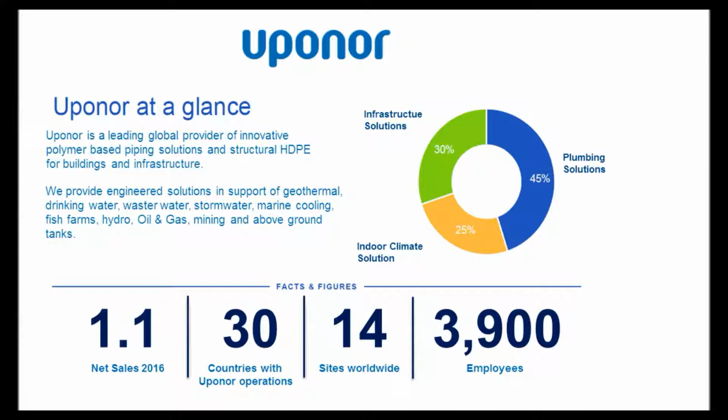Uponor globally also helps to support our local engineering groups in areas of R&D, FEA analysis, and project review and design. On more of a local level for North America, Uponor operates several offices located throughout the U.S. and Canada. Formerly, much of our business in North America was conducted under the name of KWH, which you may know us by, but in 2013, the name was changed to Uponor Infra, and that's how we're now recognized in North America.

We've been manufacturing HDPE since 1967, so actually this year we'll be celebrating our 50th anniversary of HDPE manufacturing. Some of you may be familiar with some of our trade name products such as Sclairpipe, Wehogas, Weholite, and Wehopanel. Those are our main trades.

All of our manufacturing facilities are ISO 9001-2008 certified. Our products and systems we have certified to many standards such as NSF, CSA, FM, BNQ, ASTM, and others. Since we manufacture and support systems right across North America, it's important to have those certifications.

Our head office is in Mississauga in Ontario. It is responsible for day-to-day project design, modeling, FEA analysis, 2D design, as well as support to our custom fabrication. As well, in addition, Brian heads up a lot of our FEA analysis and design as well.

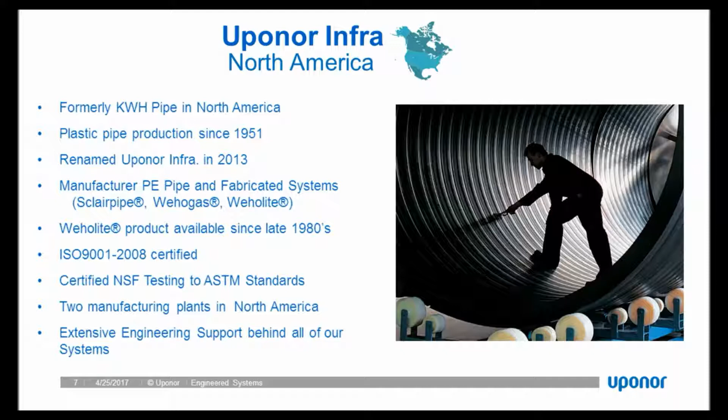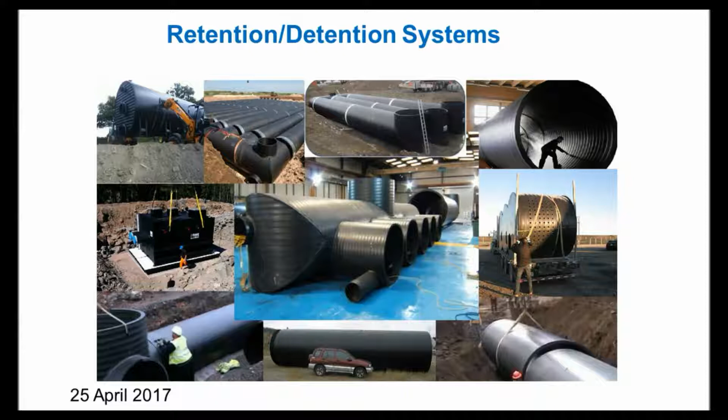Some of our retention-detention systems, just a quick collage of some of the systems we see. I won't go into it, but you can say we have barrel system designs, and what we'll be talking today is the modular design.

So quickly, since a lot of you probably already know what HDPE is, but just to touch on why HDPE is part of the resin properties. The resin used to make Weholite pipe and Wehopanel have long-term properties. The 2 main properties critical in establishing the long-term life expectancy of a 100-year design for it is stress rating, the maximum stress levels that can be sustained for a period of 50 years, and also slow crack growth resistance.

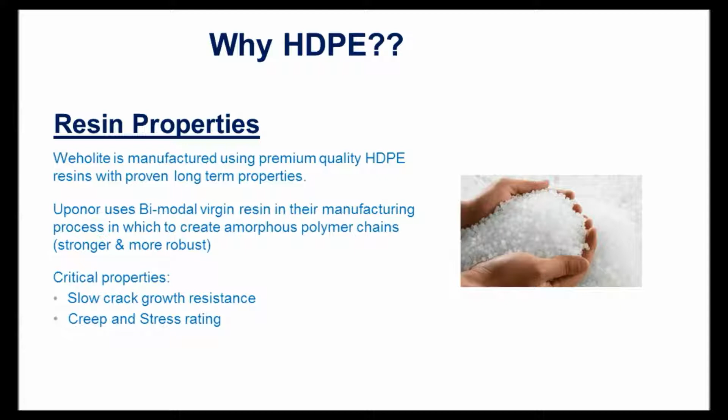The other aspect for HDPE, if you ever have a chance to see it on site, it's very smooth internally and externally. And the mannings, which we term as the manning number, this is the friction between a pipe surface and the water flowing next to it. The different piping materials have different friction factors in the mannings number. Concrete's initial value is 0.013, whereas HDPE has a significantly lower number.

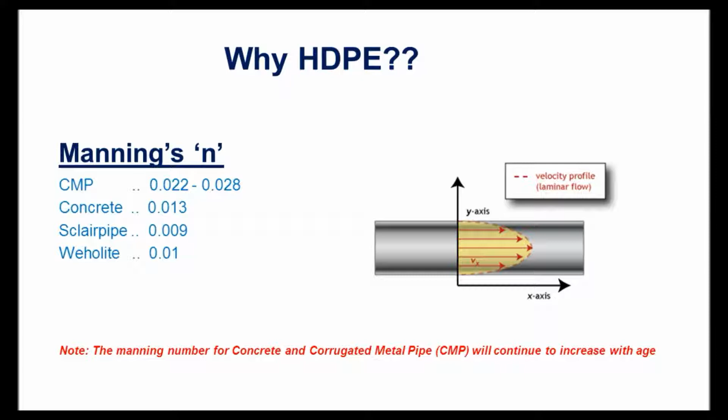What this means is that I can have a smaller diameter pipe for the same flow as something as a concrete pipe. So by using a smaller pipe, I can actually reduce my costs but maintain my same flows.

Concrete versus flexible pipe, and I bring up concrete because that's probably much one of the main things we see in the industry, which is slowly changing to more polymer solutions.

You can kind of see this is kind of a standard photo on the left. You can see it's a photo taken from the American Concrete Pipe Association, basically promoting the virtues of rigid concrete pipe. You can see a bunch of people and sacks weighted on top of this pipe.

It points out that the primary feature of the concrete pipe, and that's really it supports a lot of weight. The rigid pipe design approach is well accepted design method.

But today's pipes are designed using flexible pipe approach, uses the surrounding soil of buried pipe to provide some structural support to the pipe, whereas concrete provides all of the structural support and can be buried very close to the surface. What flexible pipe does, it

uses the interactions with the soil to provide additional support. And by using the flexible pipe to interact with surrounding soils, we benefit by having a pipe capable of addressing developed stresses resulting from misinstallation, which is a big one, rather than developing pinpoint stresses or developing stress fractures or shear cracks in pipe, which are sitting on top of rocks.

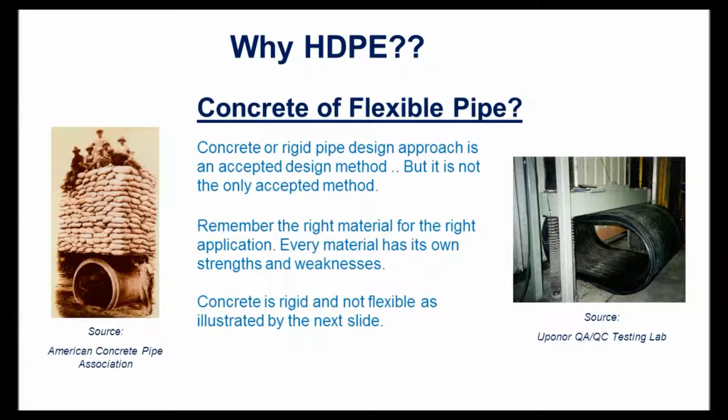To further, just to touch on that a little bit more, both rigid and flexible pipe design methods work. Like anything, is that there is no panacea or one solution fits all. But in cases where you're burying pipe, HDPE is a very good option.

The rigid pipe, with help of surrounding soil, has sufficient strength to carry imposed loads. Flexible pipe is deflected and mobilize sufficient soil support to carry imposed loads. Deflection of pipe is typically equalized.

You can see in this picture the radial pressures acting inwards, loaded like a compression ring. This illustrates failed conditions on a concrete pipe, because it can't flex and use the surrounding soil, it has to take the entire load. This occurs when the imposed live load or dead loading conditions are exceeded.

So just a quick overview of the difference between flexible and rigid pipe.

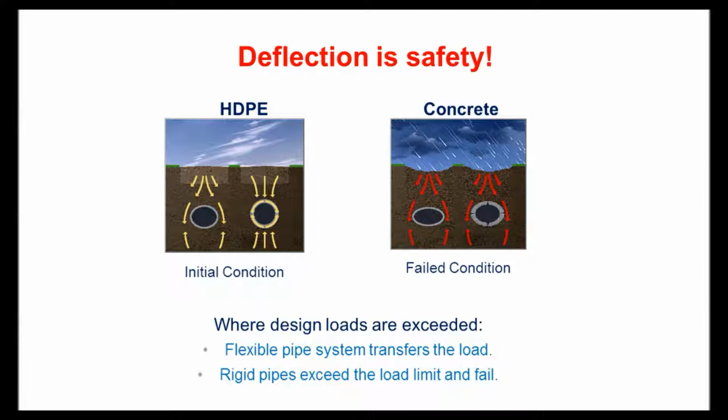The other important characteristic of HDPE is the inertness of the material, which allows us to design to a 100-year design life. Acid and bases commonly cause premature deterioration in stormwater systems, especially concrete, as it dissolves the concrete. Acid and bases can enter a stormwater system through the introduction of fertilizers, industrial soaps, or any other contaminant that can be flushed down a sewer.

Hydrogen sulfide is also a concern. It can cause deterioration of the concrete pipe, particularly at the crown, where it's typically present when organics are in the water, whereas HDPE is unaffected by H2S or hydrogen sulfide.

Lastly, HDPE is a non-metal, so it doesn't suffer from corrosion mechanisms such as oxidation reactions. Many concrete pipes, such as pre-stressed concrete cylinder pipe or PCCP, have metal wires wrapped around the inside of the pipe to help strengthen it. The problem occurs over time when these metals corrode and snap, the wires lose their integrity, and in turn the entire pipe loses its structural integrity.

Another benefit to HDPE is its abrasion resistance. When impacted, it's able to absorb the energy from particles. So any application where you see particulate or sand, this is the material to use because it reduces abrasion, and it's very common to have sand or particulate in a stormwater sewer system.

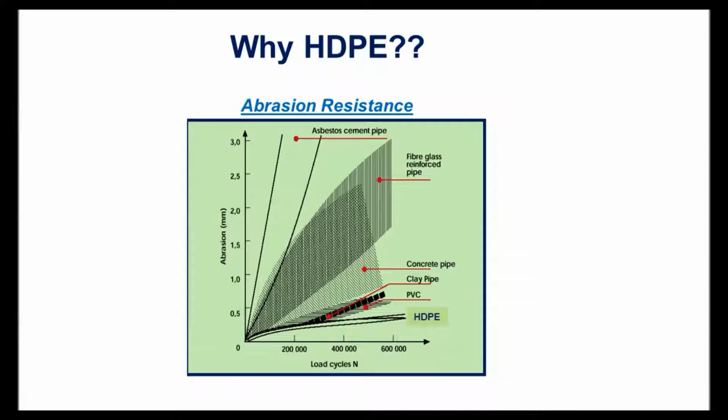I'll just leave one other slide before Brian takes over. I was at a conference a year ago, and one of the presenters brought up that we're seeing a movement in North America away from conventional materials, toward HDPE, or polymer generally since PVC is there as well. Polymer pipes and materials are moving up and becoming more recognized within municipalities, due to more applications being successfully installed and people realizing that overall operating costs and life cycle costs have dropped significantly.

So that being said, I'll hand the presentation now over to Brian.

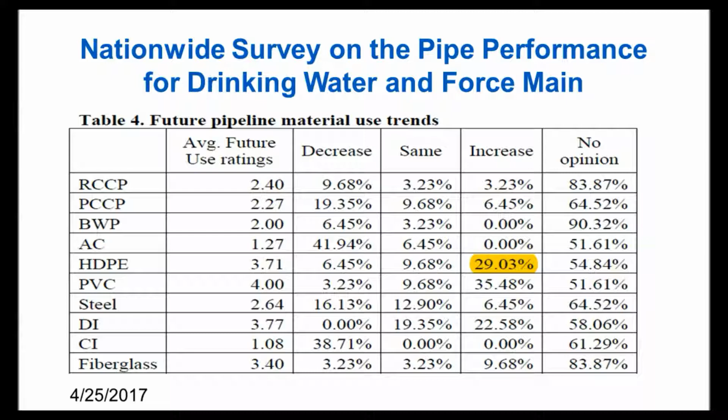What I'd like to do now is briefly discuss Weholite and Weholite modular materials, how they're fabricated, and how they can be utilized for a number of different applications. Then we'll speak to stormwater water quality and quantity management and how Weholite modular can be utilized for those applications. We'll briefly cover thermoplastic welding, structural design, and then cap it off with a review of our recent in-field live full-scale load test that we conducted to validate our structural design methodologies.

As Grant mentioned, Weholite has been manufactured in North America since 1981. We have been producing ASTM F894 structural profile wall pipe up to 132 inches in diameter in 2 facilities in North America. In 2013, we took that rectangular panel cross-section and utilized it to develop a material we refer to as Wehopanel, or also Weholite modular, our rectangular configuration for structural profile wall systems.

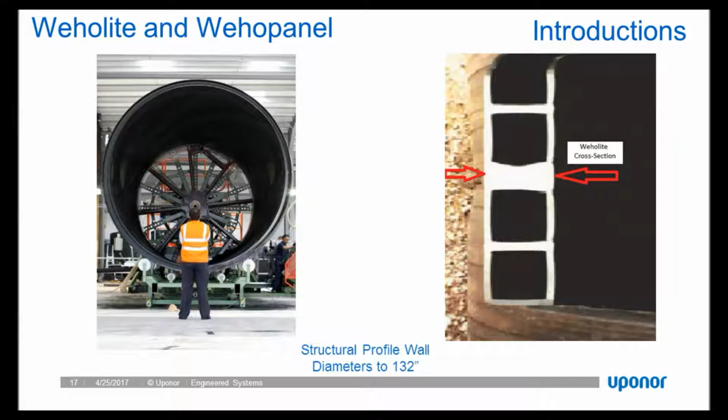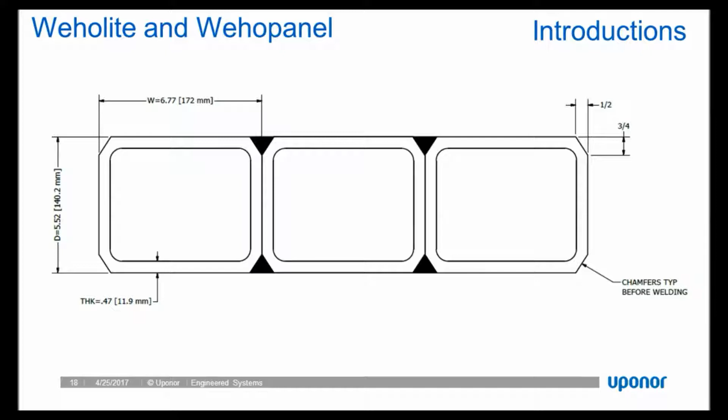Both Weholite and Weholite modular rely on a robust rectangular cross-section, which you can see there. This gives us a double wall profile and allows us to provide both inside and outside extrusion welds to provide an extremely durable system that's ideal for applications where a leak-free system is required, specifically stormwater, wastewater, and potable water applications where zero leakage is acceptable. Weholite and Weholite modular are ideal solutions for those applications.

Here you can see a snapshot of a 132-inch diameter Weholite vessel being extruded in a spiral wound configuration in our Huntsville manufacturing facility with our quality control inspectors. You can see in that photo the individual stripes represent the individual rectangular profiles and the extrusion weld between them.

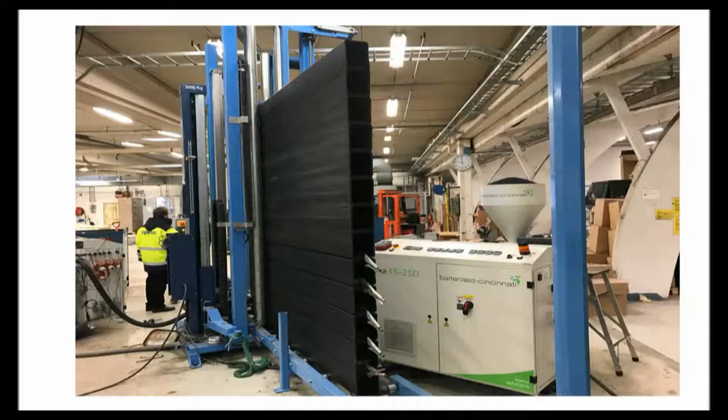Similarly, we can extrude panels of material in our Wehopanel and then use those flat sheets to create rectangular structures, bulkheads, baffle walls, anything you can imagine. What Uponor endeavors to do is take our Weholite and Wehopanel materials and combine those with thermoplastic fabrication and fusion welding to create a host of applications for the water, wastewater, and stormwater space—essentially anything you can think of where the pumping, treatment, or storage of water is required.

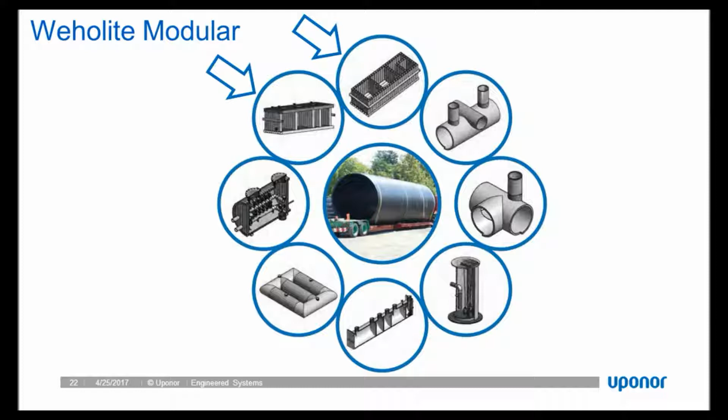We can manufacture a custom-engineered solution that not only provides a leak-free solution, but also provides a system that has a 100-year design life and enhanced durability.

There are some distinct advantages to Weholite modular, rectangular configuration, 100% polyethylene systems. What most folks would come to conclude is that durability and sustainability are the primary advantages. We're immune to pH, hydrogen sulfide, and corrosion, and can provide a 100-year design life.

What most folks also don't know is that polyethylene welds much like steel, and that allows us to design and fabricate almost any configuration necessary to support a project, whether it's internal baffle walls, pumps, controls, instrumentation, suspended solid hopper bottoms. We can come up with a design to meet the project needs by custom fabricating all the internal controls and components.

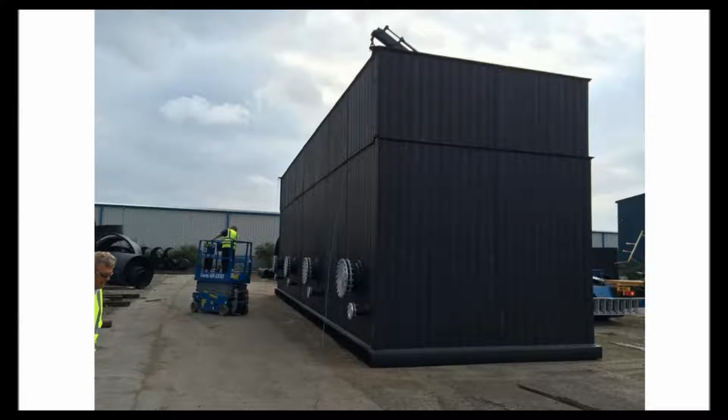Some examples of the versatility of the material that are a little bit outside the stormwater quality, quantity, and other boxes that folks might think of. We'll show you some projects here.

This is an extremely large, 14-foot high, 50-foot long, total suspended solids baffle wall separation system. This project, in addition to demonstrating the versatility of the material, also shows you that we can produce much, much larger structures than could normally be accommodated with concrete.

Had we built this structure in particular with concrete, it would have required multiple loads. If it were precast, if it were cast in place, it would have been an extensive forming and pouring time in the field to create a structure of this magnitude.

Alternatively, we can create this structure as one unit with all internal components prefabricated in it, and also quality control tested and leak inspection tested in the factory and in the field to ensure a high-quality leak-free system is achieved.

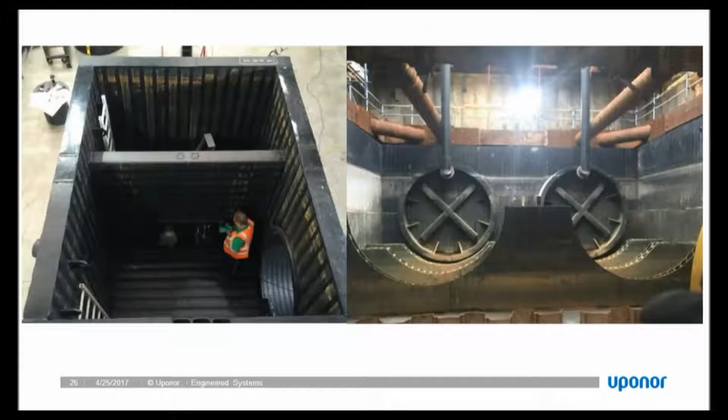These two photos just demonstrate some more details and applications we can use Weholite Modular for. Here on the left-hand side, you see a stormwater outlet control structure that has a polyethylene baffle wall with low-flow controls, access ladder, and inlet port.

That particular baffle wall would have to be reinforced to accommodate full hydrostatic pressure differential, or ponded depth on one side and zero ponding on the other. And that's something that the Weholite structural profile allows us to reinforce the annular space to accommodate any loadings we encounter in the field or in design.

On the right-hand side, you see a large-scale hydroelectric power plant intake facility that was actually welded in the field to support the magnitude of that project, just demonstrating the versatility of the material.

Another project which also demonstrates the versatility of Weholite is what we refer to sometimes as engineered art. This is an above-ground ultraviolet treatment facility for a potable water plant.

This particular project required haunch support, as some might conclude. Horizontal pipes full of water require support of the haunches to prevent the pipe from squatting under the weight of water. So we're able to actually use Weholite panel to create that haunch support and a base for the system.

And develop a completely leak-free polyethylene UV treatment system and deliver it to the project ready to be plumbed and brought online. Just another example of the versatility of the material and our ability to support engineers with developing new solutions to old challenges.

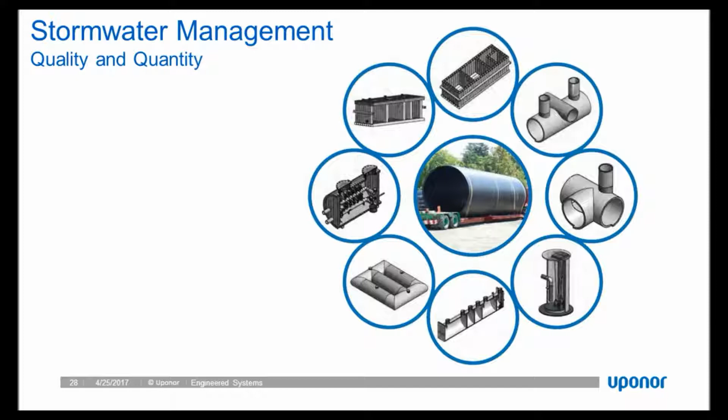So what I'd like to do now is branch into some specifics regarding stormwater management, specifically quality management and quantity management, and how we use Weholite Modular to meet those challenges. To discuss quality management, we need to break out hydrodynamic separation and media filtration as two distinct approaches to providing particulate removal, TSS (total suspended solids) removal, and total phosphorus, which is usually the nutrient tracked in most jurisdictions for nutrient removal.

When we speak to hydrodynamic separation, the industry and jurisdictional authorities have evolved to prefer it be utilized for pre-treatment only. It can be used in some jurisdictions as standalone treatment. However, it does not achieve the removal rates that media filtration does, so most jurisdictional authorities have relegated hydrodynamic separation for use as pre-treatment, as part of a treatment train to provide trash, debris, and large particulate removal. HDS systems typically remove particles in the range of 125 microns and up.

They're typically awarded a 50 to 60% total suspended solids removal rating and a pretty low 20 to 25% nutrient, or total phosphorus, removal rating. So when we look at HDS, we should be aware that HDS systems are typically vessel systems, round, cylindrical, vertical vessels, or horizontal systems with baffle walls. So Weholite modular, large-scale rectangular structures are not often going to be cost-effective approaches for the smaller-scale HDS pretreatment units.

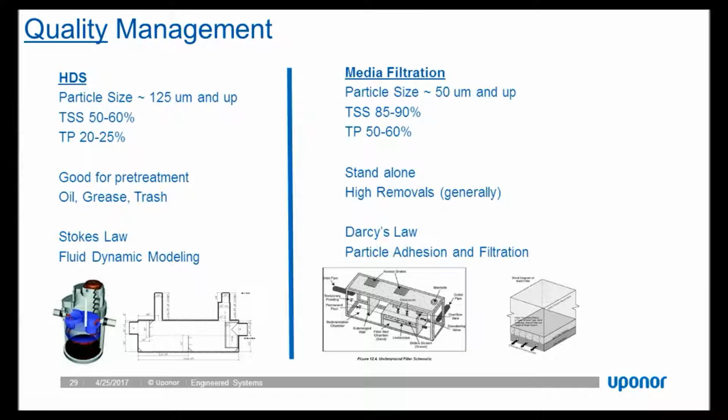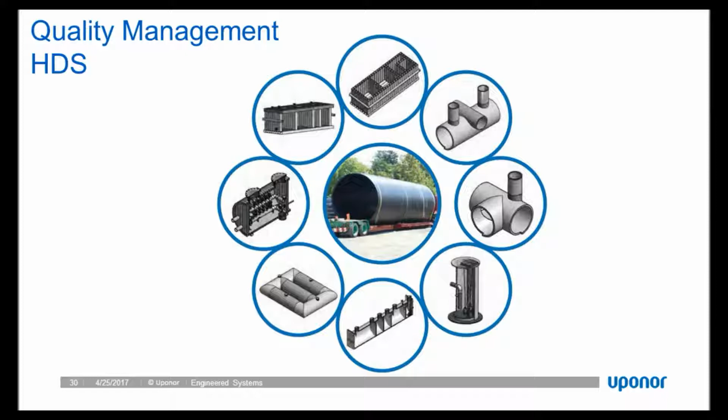So to speak again to hydrodynamic separation using Weholite modular, we're not looking at smaller scale, round, vertical or horizontal vessels. We're looking at larger scale systems with high debris loads and high flow rates, where we want to remove large amounts of sediment and/or handle high flow rates. Uponor can work directly with the engineer to develop a custom system that uses hopper bottoms, internal baffle walls, and flow controls to remove 50 to 60% total suspended solids, trash, and oil. And you're also going to get that 20 to 25% total phosphorus removal rating.

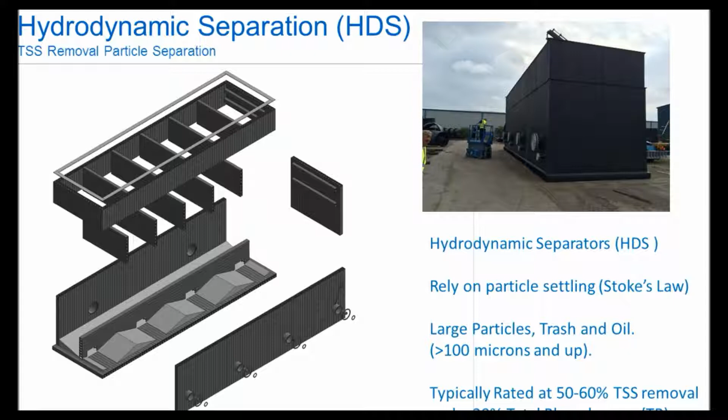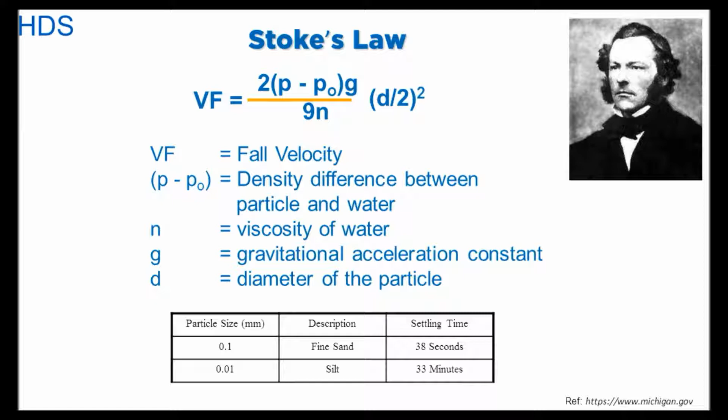The basics of hydrodynamic separation design go back to Stokes' law. In the interest of time, I'm not going to go through Stokes' law, but basically what we would do is work with the engineer of record and develop a TSS removal calculation that supports their project based on the most critical design parameter, which would be particle size, and then also flow rate. Then, based on our knowledge of the project site, we determine the debris loading for that particular project. Uponor can support any project where the engineer wants to develop a custom large-scale Weholite modular hydrodynamic separation system in accordance with jurisdictional regulation.

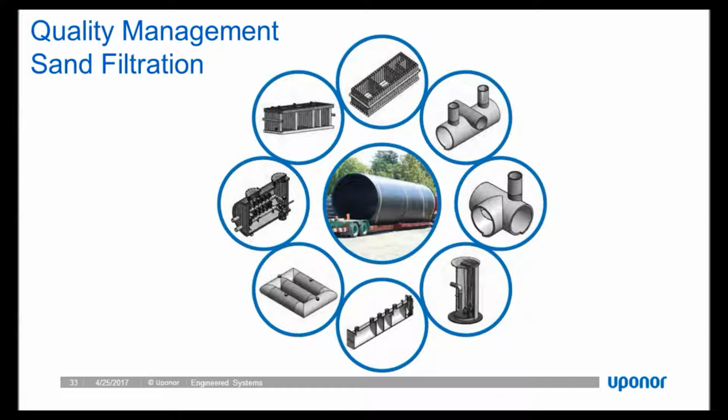Moving along to quality management using media filtration, as we said earlier, sand filtration has been around for a long time, highly tested, validated, and approvable by most jurisdictions. Uponor has taken the approach to adopt local sand filter regulations and design methodology and incorporate those into our Weholite modular system. Historically, structural sand filters had fallen by the wayside because their size and scale in precast form made them less cost effective. But because we can now build a rectangular vault much larger and more cost effectively using Weholite modular, we're able to build larger sand filters more cost effectively and make them a more viable option for projects.

For those not familiar with structural sand filters, it's a fairly simple concept and very easy to maintain. It has an inlet pipe with an energy dissipator and a sedimentation bay that allows sedimentation, trash, and debris to be isolated to the front of the system. It's typically sized to 25% of the water quality volume in that first chamber there on the left.

We'll have a baffle wall followed by a level spreader to distribute flow across the media bed. Then we'll have a sand filter bed that also has geotextile and gravel on top to prevent channelization, occlusion of the sand media, and erosion and scour.

That sand filter bed area is sized to provide water quality treatment for the flow rate on a given project, based on the impervious area and the water quality depth for that project. Finally, we have an outlet control wall and an outlet control bay that can have low flow discharge to regulate your low flows in accordance with your local regulation.

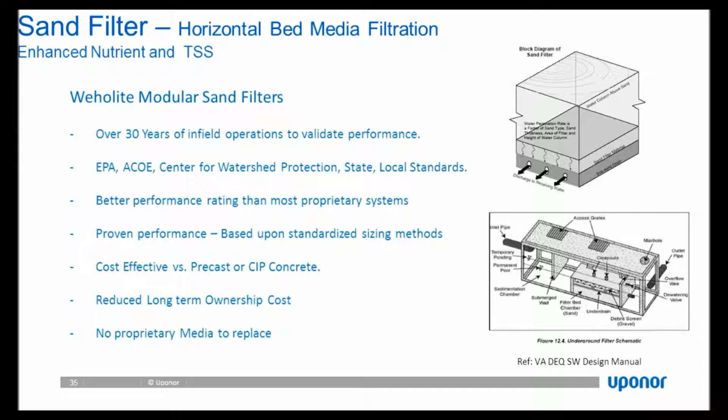So Uponor has taken this approach to provide media filtration in a non-proprietary way, to free owners of the burden of being locked into a long-term proprietary media replacement program.

This slide demonstrates the host of testing and design calculation standards out there in the industry. Any one of us can Google our jurisdictional authority and type 'sand filter' after it, and it's likely you'll find a standard in your area, but it'll all link back to Darcy's law.

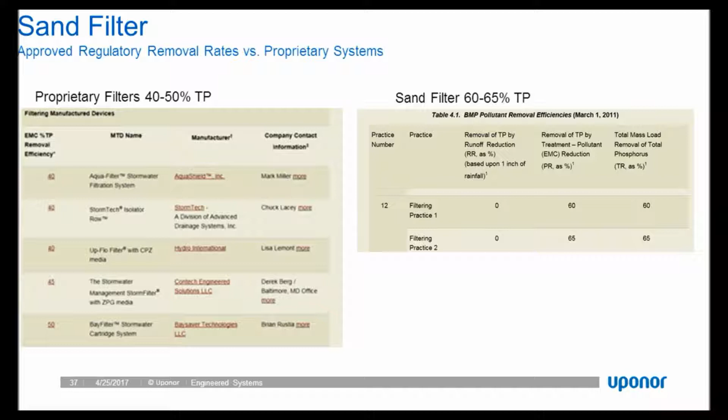This particular table demonstrates that the Virginia DEQ only awards a 40 to 50% total phosphorus removal rating to proprietary systems, whereas sand filters get a 60 to 65% total phosphorus removal rating with the Virginia DEQ, who is a recognized authority in the world of stormwater quality management.

There are 3 distinct standards you'll see in jurisdictional authority guidelines regarding sand filter technology: specifically the Washington, D.C. Underground Sand Filter, the Delaware Sand Filter, and the Austin Sand Filter. These technologies have been around for over 30 years. However, the D.C. Underground Sand Filter Vault is the structural BMP sand filter you'll see most used.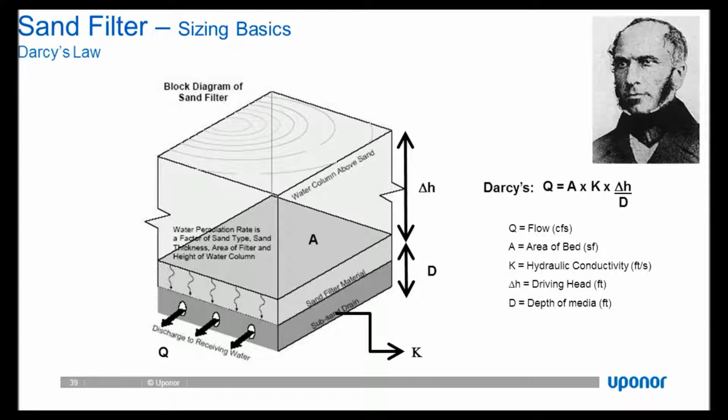Some might also change the volume required for the pretreatment bay, or the max depth of the media, or head over the system, but they all still rely upon the fundamentals of Darcy's law. If you understand Darcy's law and flow through the media, you'll be able to quickly decipher the jurisdictional authorities' guidelines for sand filter sizing, and it'll become a little clearer as you look at it.

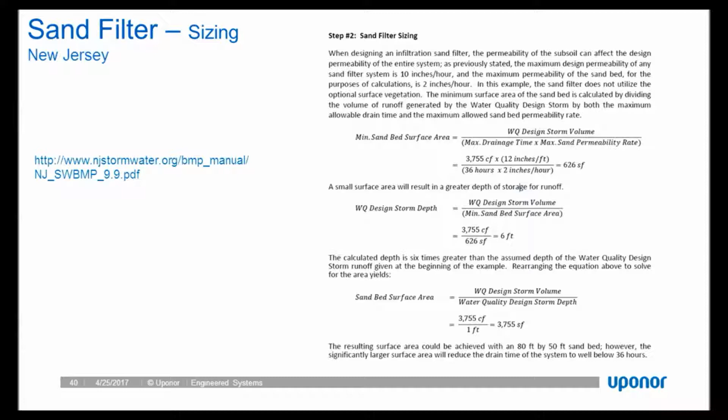To that effect, the New Jersey Stormwater BMP Design Manual has sand filter specifications and sizing regulations based on a water quality design storm, where they correlate the water quality flow rate volume to a filter bed area, and that's how that's calculated.

Conversely, we also have the Virginia DEQ, just as an example, where the area of the filter is based on a treatment volume—again, water quality volume. That's your volume of water that requires filtration.

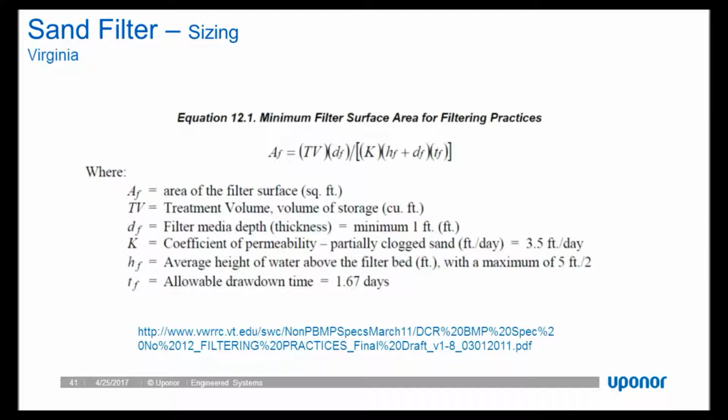Their surface area is based on that, but again, both of those methodologies link back to Darcy's law. Not to spend too much time on sand filter calculations, Uponor will work with the engineer of record, civil engineer, to develop sizing that works with that particular jurisdiction, whether Seattle, Ontario, Virginia, or Florida. We look at that jurisdictional authority's sizing methodology.

We have extensive sand filter sizing calculation tools. We rely on the civil engineer of record to do the hydrology, to calculate the water quality volume, their channel protection volume, and their low flow water quality flow rates and high flow rates.

We provide some form of splitting, either a low flow, high flow orifice or weir split prior to the structure. Then we take that information and design the sand filter based on the local jurisdictional authority requirements, sharing that with the engineer along with some structural details, specifications and standards for the sand filter so they can incorporate it into the plan.

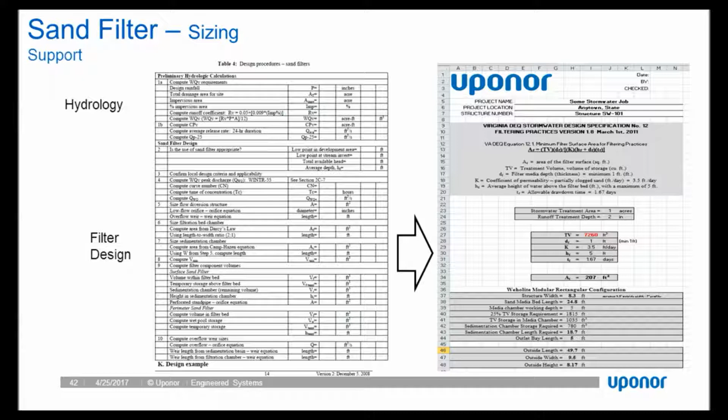That's the level of support we provide engineers, recognizing that many engineers do not have structural design capabilities or sand filter design capabilities. We're here to help them get through and give them the tools and resources they need so they can support their owners with a non-proprietary system.

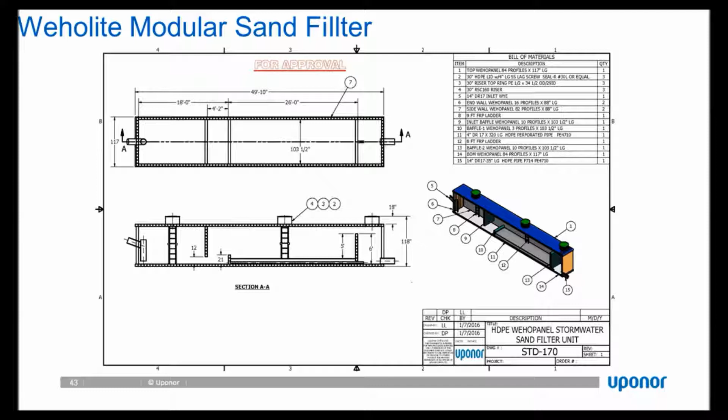Here you see a snapshot of a Weholite modular sand filter drawing. It's a very simple bill of materials, identifying all the components inside the system. Again, you saw this slide earlier where we talk about the fundamental components incorporated into any sand filter. This is a good basis of what most sand filters would look like.

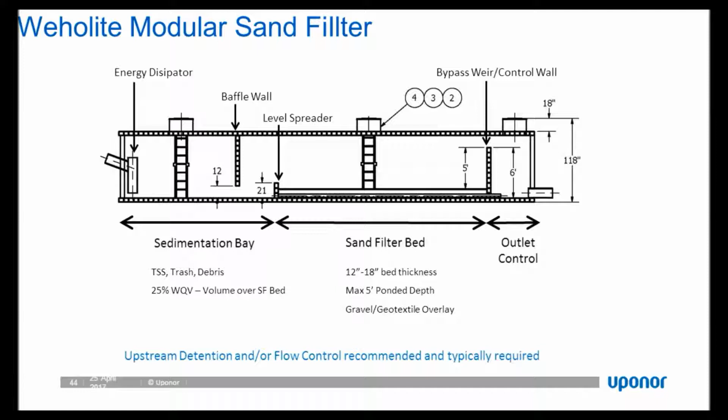If they needed to get larger, we could also link multiple units together to create much larger sand filters as required for a given project. So with that, I'm ready to transition into quantity management and storage.

Where quantity management is concerned, we don't discuss it here in depth since this is a Weholite modular rectangular discussion. However, Uponor does manufacture large manifold storage structures using large diameter pipe, up to 132 inches in round pipe, with prefabricated manifolds to connect them hydraulically. When storing large quantities of water below ground for peak flow attenuation, round pipe is almost always going to be the more cost-effective approach.

So when we're looking at a project and supporting an engineer, the first place we'll look is whether we can get a round configuration to fit within the available footprint, because that's going to be more cost-effective. However, if existing site conditions, building location, roads, existing or proposed utilities, or other project features significantly limit the footprint and make round infeasible, then we can look at doing a rectangular Weholite modular detention structure.

It will be slightly more costly than a round system. However, the benefits of reducing the footprint can also sometimes reduce the backfill, excavation cost, and disturbance on other parts of the site, which may make that additional cost worthwhile for the project. And we can look at both round and rectangular.

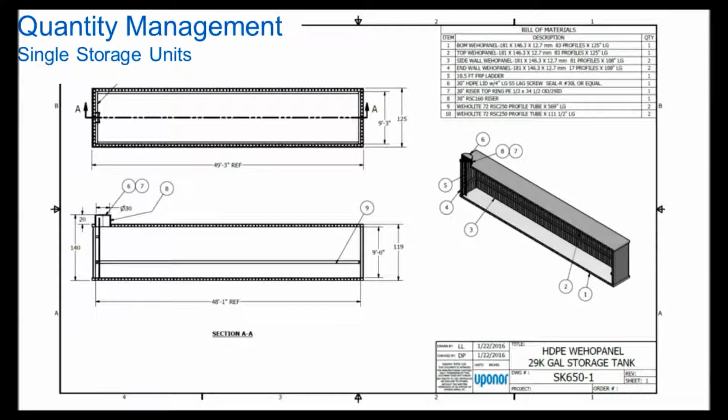This is a snapshot of a simple rectangular Weholite modular quantity management system. This one would just be a single structure. We can incorporate an outlet control baffle wall with low flow, mid flow, and high flow weirs, and any internal components necessary for the project into that quantity management system, including a confluence with an energy dissipator to bring multiple pipes into, say, a forebay inside the structure. We can do that as well with some internal baffle walls.

Similarly, we can link multiple Weholite modular structures together hydraulically in what we refer to as a Weholite modular array, where we take multiple structures based on the available hydraulic storage depth on a project, how much ponding we can get without impacting the upstream HGL. That dictates how much height we have in the system, and obviously our site footprint would dictate the horizontal configuration.

We can typically squeeze much more water into a tighter footprint using a rectangular Weholite modular array than we can with round. Additionally, we don't have the pipe-to-pipe backfill that we'd see in a manifold system, so the systems become significantly smaller, and typically a Weholite modular footprint would be about 50% of an equivalent round footprint. So again, round is going to be more cost-effective. However, if you do not have the available footprint, rectangular can often be used to solve those challenges.

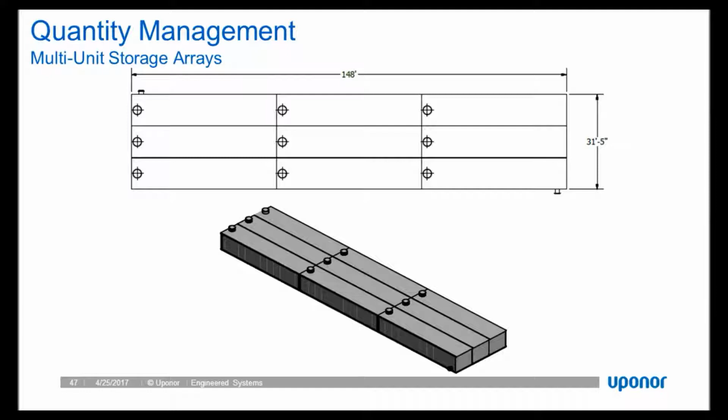Here we can see another snapshot of that array and some detailed plans, and how we handle the hydraulic connectivity between the two vessels in that slide there.

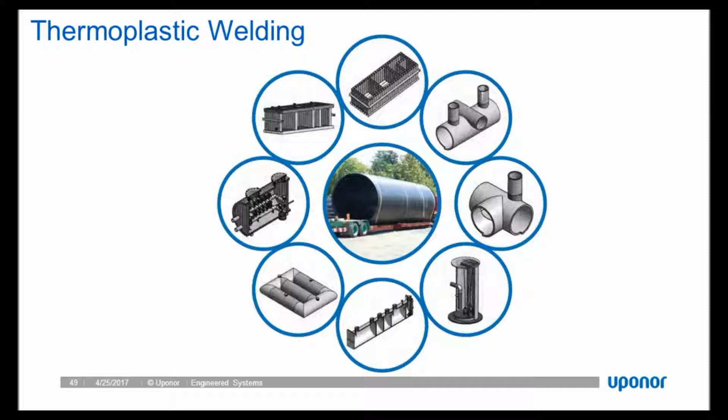So now I'll move on to thermoplastic fusion welding. This could be a very long discussion, but I decided to include it here so folks have an understanding of thermoplastic fusion welding, because it is a cornerstone of how we fabricate systems and how we justify the structural design of our systems.

Thermoplastic fusion welding should not be confused with techniques such as gluing, brazing, or soldering, which create a seam and do not actually melt the base materials to create a monolithic material. Thermoplastic fusion welding involves heating the base materials A, B, and a filler to a prescribed temperature range based on material type and thickness to create a homogeneous weld pool, such that we get molecular alignment of the weld material across that seam, and we don't have a weak point in the structure.

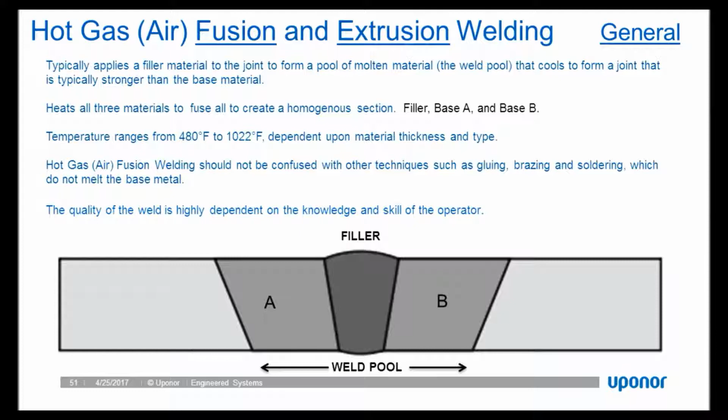As a matter of fact, when we go to do tensile strength tests, that weld should be the strongest part of the system, as we would expect, because it should be a little bit thicker than the rest of the material. So when we do a tensile strength test, as we'll see in a little bit, the actual profile should fail, not the weld seam.

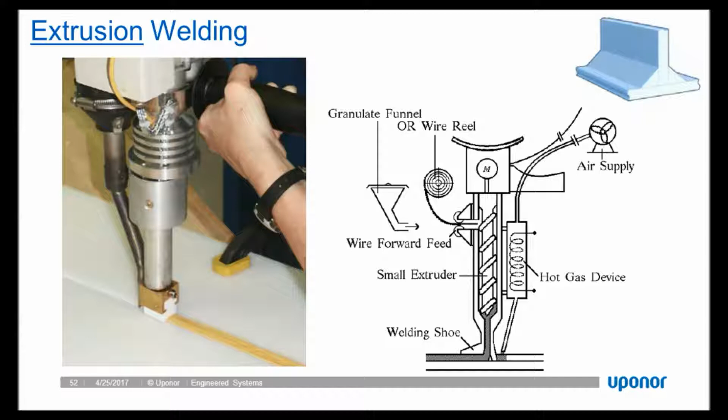Just to familiarize folks with what extrusion welding is, we pass a granulate or wire reel of material through an extrusion chamber, which melts that material and then applies it to the weld with a welding shoe sized for the type of weld it is, the geometry, whether it's a 90-degree, a chamfer, or butt-end connection. There'll be a specific weld shoe for that. We also heat the base materials with air to get them to the prescribed temperature. So again: heat the weld material, bring it to the prescribed temperature, very important.

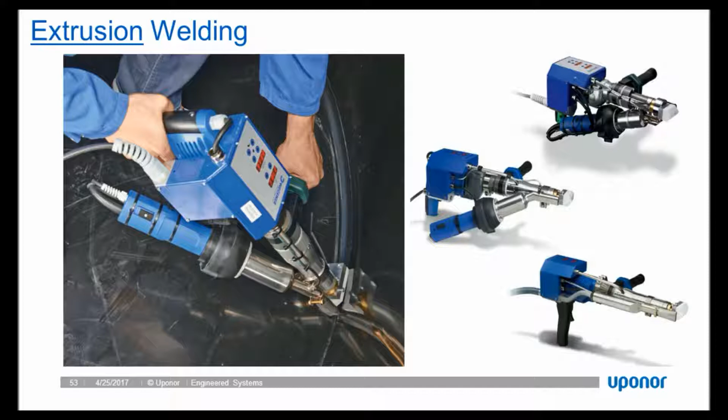Here you can see a welding technician applying an extrusion weld to the bottom. You can see a dull appearing haze following that weld, which we'll talk about in quality control.

There are two standards in America that would be adhered to for thermoplastic fusion welding. Anyone can go buy an extrusion welding gun and weld things in their garage. However, it's important for manufacturers to adopt the standards that are out there, specifically DVS and AWS, and we'll show you ASTM standards as well. DVS is the grandfather of polyethylene welding standards. It's been around for a long time. Their standards are extremely strict, and Uponor adheres to DVS standards.

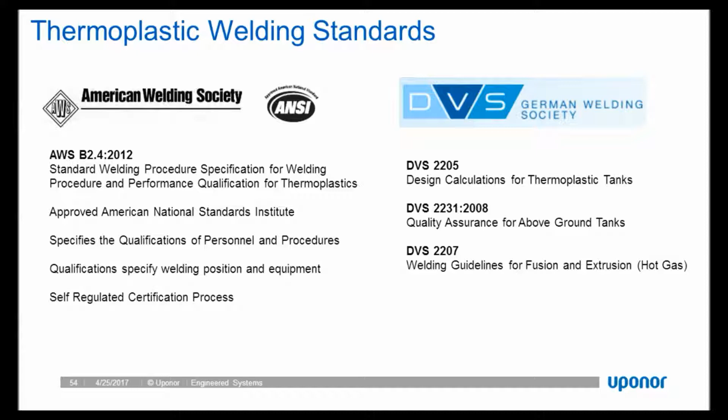AWS welding recently came online. It's more of a self-certification program or quality control program for the qualifications, procedures, and performance related to thermoplastic welding, and allows manufacturers to fall in line through a sort of self-regulated process under AWS. Uponor meets both DVS and AWS standards, and any manufacturer who manufactures structural polyethylene systems should.

As I mentioned, there are extensive ASTM standards related to the design and manufacture of structural polyethylene systems, and these standards would apply to Weholite Modular. We won't go through these in detail, but you will hear me mention later ASTM D2321 for installation. When we work with an engineer of record to develop specifications, detail, and design, we will incorporate the necessary standards for his project and give him some boilerplate that he can bring into his specifications.

Quality control and assurance is very important where thermoplastic extrusion welding comes into play. Our first line of defense is a visual inspection. As I mentioned earlier, a heat-affected zone should follow the weld seam - this would be a dull-appearing haze or dull-appearing polyethylene as that extrusion gun follows the weld seam. If we see inconsistencies in that haze, splashes of material, or shiny spots, we did not get a good weld, and we'll have to regrind and reapply that weld to that particular part until it tests.

Pressure testing of internal voids is something that's unique to Weholite because we have a hollow annular space that is continuous through most structures. We're able to pressurize that internal void wherever there's a discontinuity, pipe penetration, top slab, or other fabricated element that might penetrate that void, and confirm that it is leak-free prior to it leaving the facility.

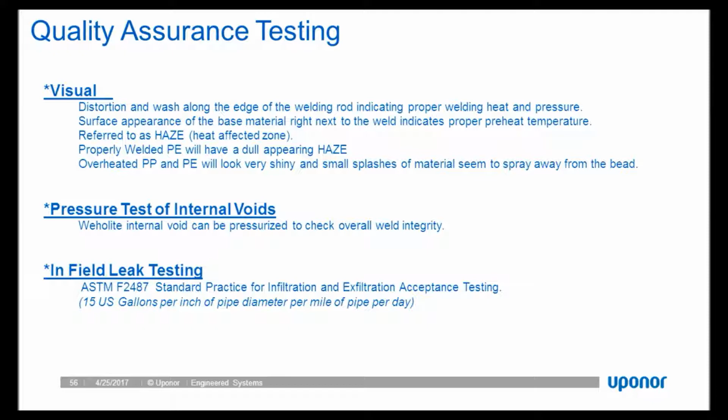And then the last line of defense for quality assurance testing would be, obviously most folks are aware of, infill and exfill testing, or some refer to as 24-hour drawdown testing, in accordance with ASTM F2487, which will fill the structure up and observe leakage rates.

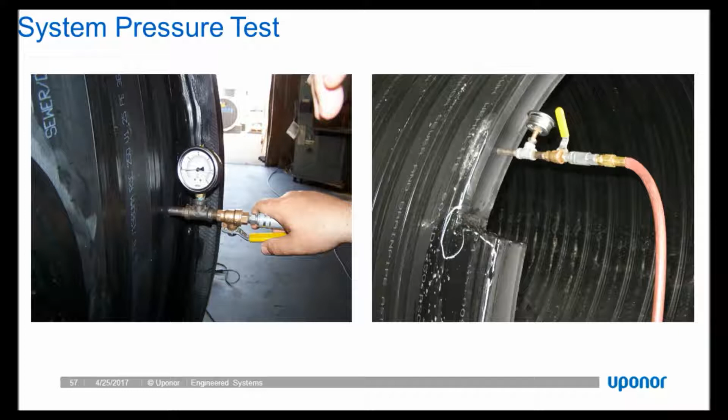Briefly discussing some applications and categories for Weholite modular rectangular structures, so we can put our minds around some of the things we have to consider when designing a Weholite modular structure. Above ground modular units for wastewater treatment, industrial applications, and sometimes stormwater management applications where they want an above ground system, maybe in a landfill application.

And then we also have below ground non-vehicular rated, which would account for pedestrian and emergency vehicular load only. And then we have below ground vehicular rated, which is rated to HS25, CL625 rating.

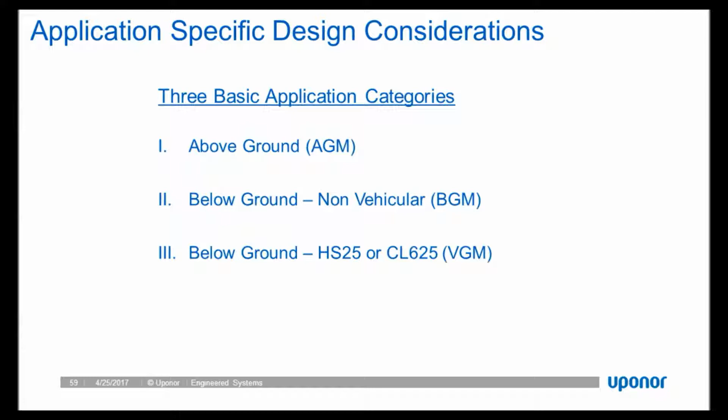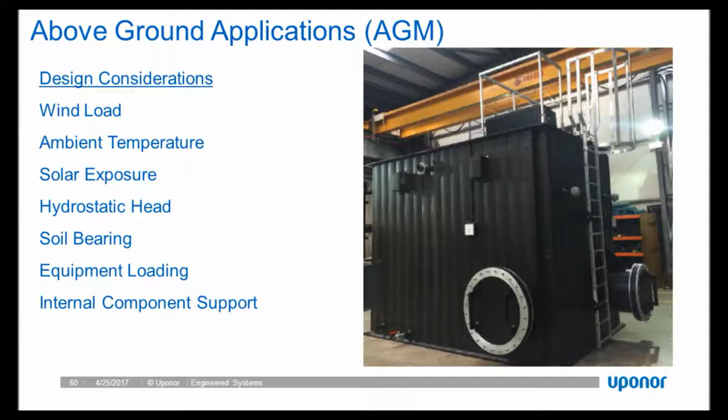Briefly running through that, for above ground we'd have to consider the wind load, local building code, also ambient temperature. If we're in the deep south, we have some projects going to the Houston area, we have to account for 110, 120 degree ambient temperature. We also have to be concerned with solar exposure. If we're in an area that could have high solar exposure, we would want some shielding, either with a canopy or with some sort of vinyl cladding or aluminum cladding on the outside of the structure to protect it from direct solar radiation. And then obviously hydrostatic head, ponded water elevation, soil bearing, or other components we'd have to consider for above ground modular.

For non-vehicular rated below ground modular units, we'd be concerned with the existing soil bearing and modulus, any existing or proposed utilities. Most non-vehicular loaded, even pedestrian-rated applications, will have what's referred to as an emergency vehicular load, which could be a fire truck or a pickup vehicle. We'd need to know what the limitations for that would be. And then obviously the pedestrian loading, typically 300 pounds per square foot, is the design consideration there.

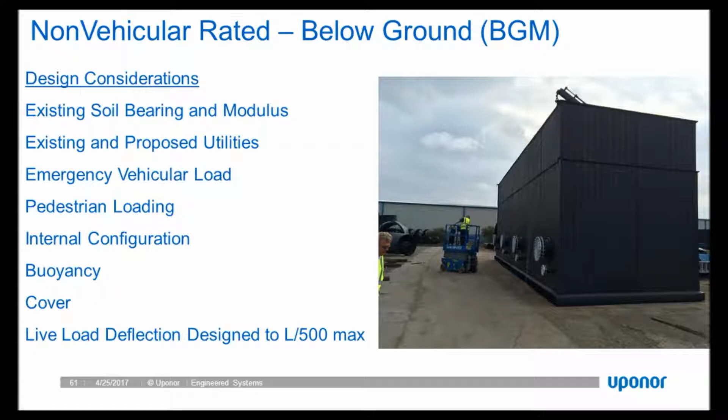And then buoyancy is a subject that comes up from time to time, where we would actually extend the base plate of the structure to capture soil column to increase the amount of soil we capture with the base to counteract buoyancy. If that cannot be sufficient, we would then also add a concrete collar from time to time when we couldn't extend the base plate sufficiently far enough to counteract buoyancy.

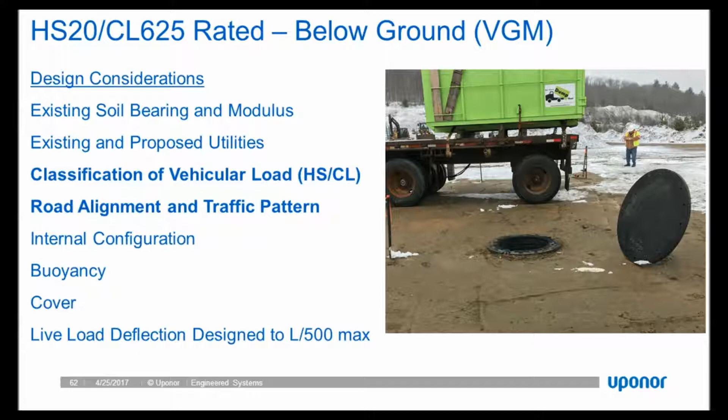The difference between below ground non-vehicular and vehicular rated is simply in the vehicular classification. All the remaining concerns are the same, but we would need to understand not only the type of vehicular load we're looking at, HS25, CL625, alternate military is sometimes a requirement, and then also what the road alignment and traffic pattern is, how many lanes there are, and what the alignment of the road over top of the structure is. We would account for that in our structural design, which we'll talk about in a second.

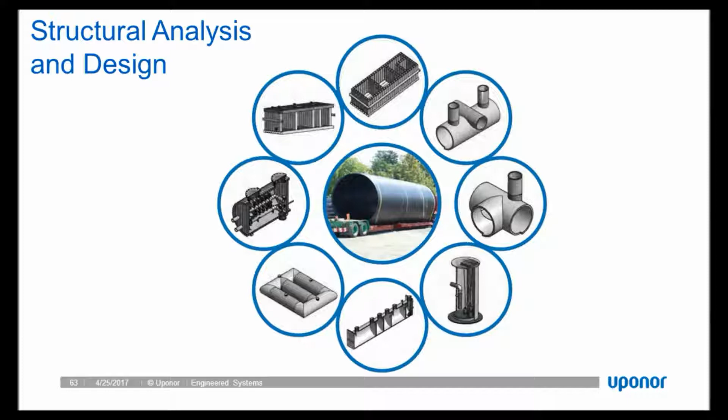Our structural analysis and design methodology really boils down to two fundamental programs that we correlate with one another. We utilize CANDE, which stands for Culvert Analysis and Design. It was a program developed back in the 1970s by Dr. Katona out of Dayton University in Ohio to analyze how buried structures interact with the soil in a nonlinear elastic type of model, in that as soil compacts, stress and strain is alleviated in the soil model and it comes to some form of homeostasis. It's not necessarily a linear elastic relationship between soil structure and load. Dr. Katona developed the CANDE model to allow us to analyze buried structures.

Uponor will utilize CANDE to evaluate the backfill, subgrade load, and vehicular load over top of the structure. We'll show you what that looks like. We also use Inventor, a three-dimensional finite element analysis program, where we'll build the structure out in 3D and apply loads to determine the deflection. We would then correlate the results of both of those and, if necessary, apply any reinforcement.

That reinforcement could come in the form of straight polyethylene profile or solid wall polyethylene reinforcement. We can also incorporate steel in the annular space of our profile to further enhance the structural rigidity of the system. So we will run a structural analysis, evaluate the deflections, stress, strain, moment shear, and determine whether additional reinforcement is required, then incorporate that into the structural design. Both methodologies are backed by material testing, full live scale load testing, which we'll talk about at the end of the presentation.

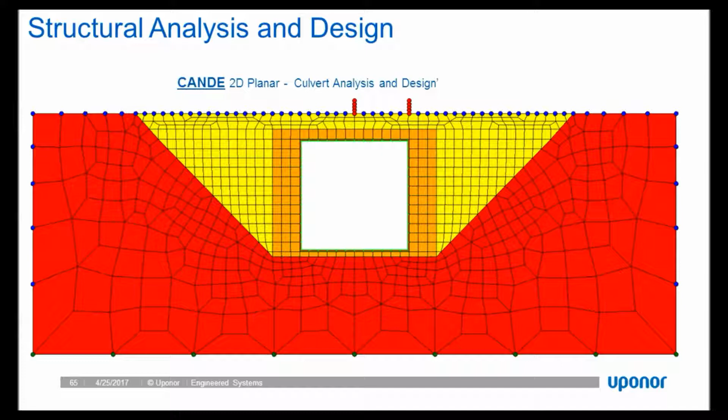We can apply a vehicular load, represented by those red dots, and move that load through increments in the program to determine where the point of max stress strain on the system occurs, then look at the deformation of the system and whether structural reinforcement is required. We can do this for single-cell or multi-cell systems.

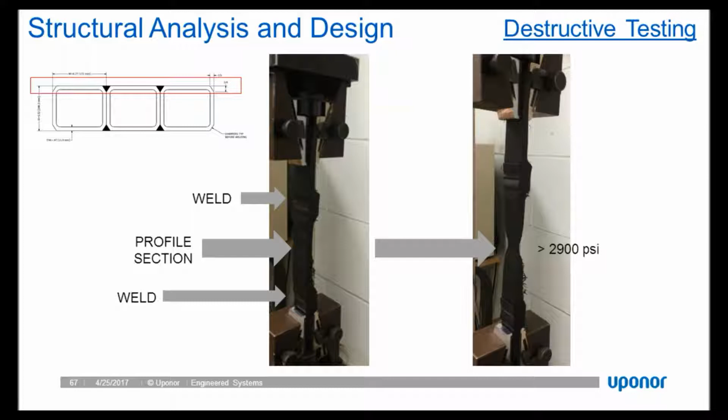As I mentioned during our thermoplastic welding discussion, destructive testing is part of our quality control program. This also reinforces that the weld seam is the strongest part of the material. Here you can see a 3-profile rectangular section, and the red box represents the coupon sample taken out of it. We turned that vertical, put it in a tensile strength test machine, and applied 2900 PSI. You can see the weld at the top, the weld at the bottom, and the profile section between them. As expected, the profile section is the first thing to fail under that pressure, confirming that our welds are strong and in line with our quality control program.

That same destructive testing is used to validate our structural design methodology, and can be shared with clients when required to validate quality control and the quality of material they're receiving on the project site.

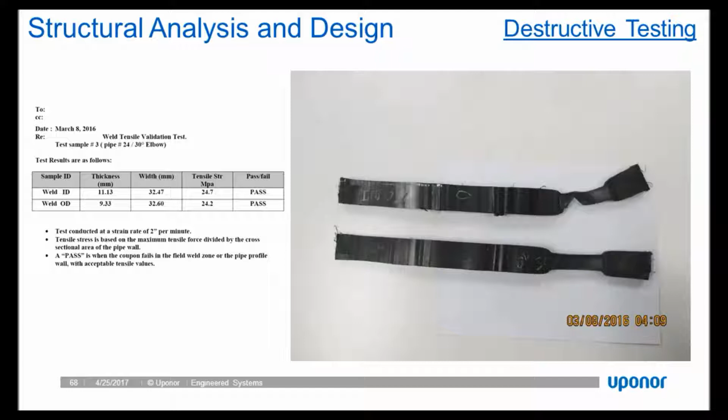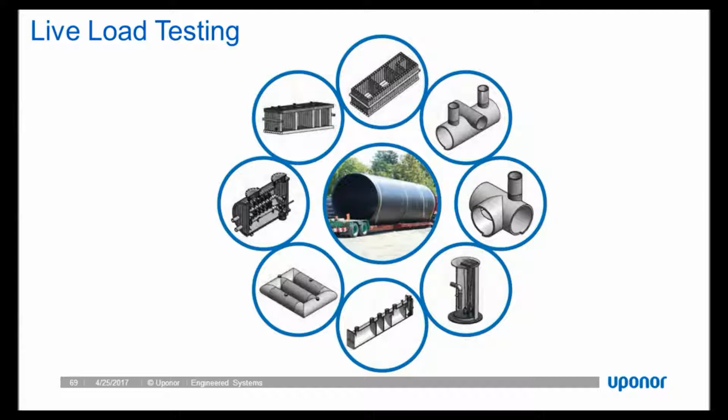To wrap it up, I'll briefly cover our live full-scale load test, something we at Uponor are very excited to have completed. It gives us the ability to effectively design below-ground Weholite modular structures under heavy vehicular loads and shallow cover applications. Most stormwater projects, whether a Weholite modular sand filter or underground detention structure, would be in shallow cover situations under parking lots - that's just how those projects tend to work out - or under a roadway. So we designed and tested our system under shallow cover with vehicular load.

We're not really getting a whole lot of mitigating effect from the soil against that HS25 or CL625 load. The soil is almost transferring that load directly to the top of the structure, and we see that as the critical design consideration. As the structure gets deeper, the angle of repose of the soil distributes the live load, so we won't get as big an impact of the live load on top of the structure.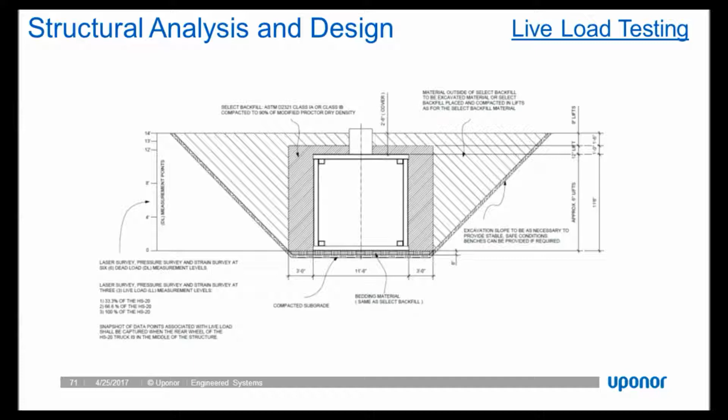It's also important to note that this live load testing was conducted on an unreinforced structure. We didn't put any reinforcement in the annular space - it's just a Weholite modular structure with some corner welds and polyethylene reinforcement in the corners, but no steel reinforcement or other reinforcement on the exterior.

To run the test, we had a number of data points to gather to calibrate our structural design in both CANDE and Inventor. On the outside of the system, we used pressure sensors to determine the pressure in the soil and how it reacted to the dead load and the live load, and whether it was changing over time and coming to some homeostasis, with pressure sensors at increments up the side of the structure.

We also had strain gauges positioned immediately under the vehicular loads, or the axle load from above. And we used a LiDAR scan on the interior of the structure - as we brought backfill up, we'd scan the structure in increments to determine how it was performing and the amount of deflection taking place inside, which we then used to calibrate our CANDE and 3D modeling.

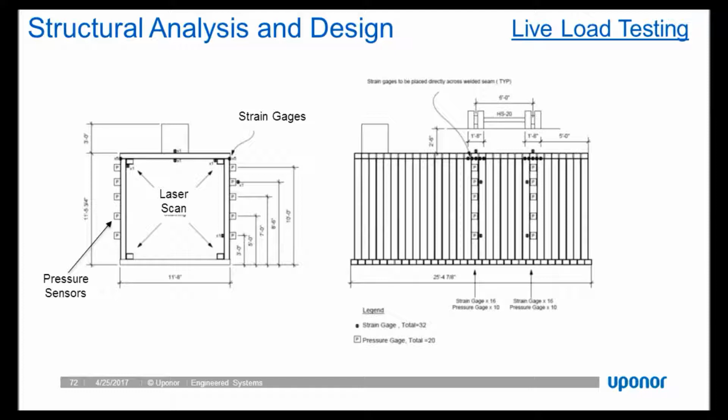The strain gauges need to be protected during the backfill process.

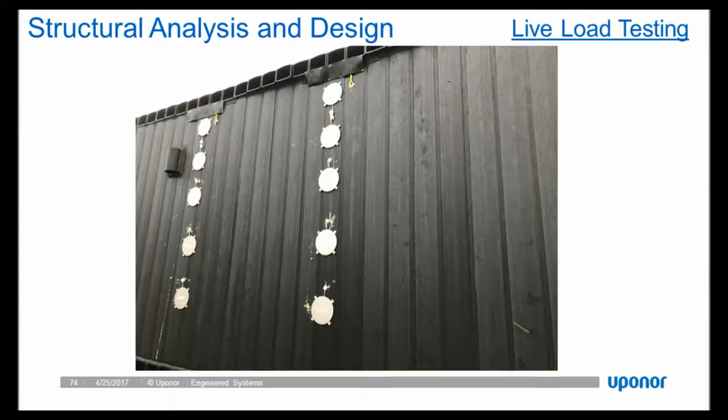As I mentioned earlier, ASTM D2321 is the standard for buried pipe installation, for flexible polyethylene pipe installation. It's the guideline that has been adhered to for many years and defines subgrade preparation, backfill selection, compaction placement, and means and methods. Although this is not a buried pipe, that standard is tried and true, so we use portions of the ASTM standard to develop standards for Weholite modulars, particularly as it relates to subgrade preparation and bearing, and then the fill zones around the structure, which are very similar to what is defined under ASTM D2321.

That's where we have what we refer to as a non-select Zone B backfill, which is a Class 3 material. A wider bandwidth of material is acceptable there. It does need to be free draining, however it can have some clays and other fines in it. It's also compacted to 90% modified proctor.

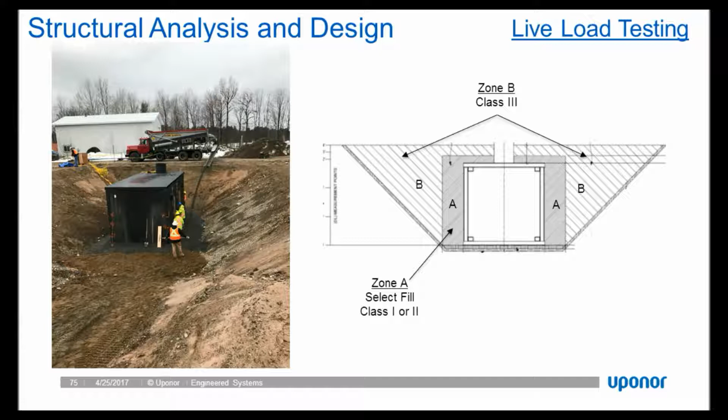Then we have our Zone A material, which is our higher quality select angular type of fill. Most folks might know the nomenclature, 57 stone, 27A. This is a Class 1 or Class 2 type of fill material in Zone A, also compacted to north of 90% modified proctor. For those not familiar with ASTM D2321, it is available, and you can look up the Zone A and Zone B backfill, or the Class 1, 2, and 3 backfill conditions, or you can just ask us and we'll share that information with you for any given project.

It's important to understand backfill is a critical component for a buried Weholite modular structure. We extended the backfill envelope 3 feet outside the structure in all directions, and that's where that Class 1 or Class 2 material is utilized. Outside of that was your non-select high-quality material, but not as high quality as this critical backfill zone.

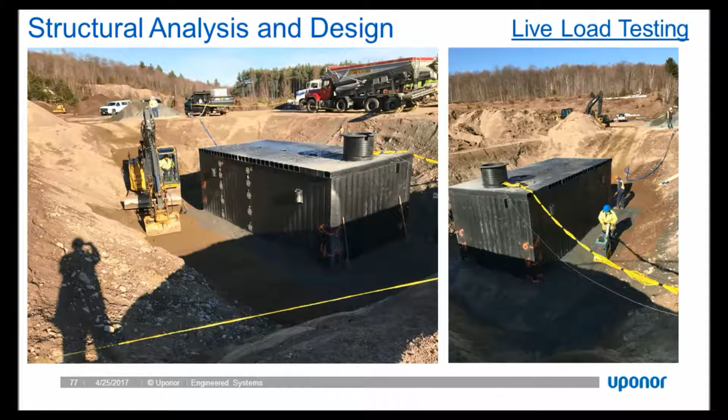Here you can see them placing and compacting the material in even lifts around the structure using walk-behind hand tampers. We don't want large equipment compacting right up next to the structures because the vibratory loads may impact the design or deflection of the system. So as is common for most buried polyethylene structures or other flexible type materials, you don't use large rollers or sheepsfoot rollers right up next to the structure. You use smaller walk-behind vibratory compactors.

Here you can see them applying some water to the backfill as it's being brought up over the top of the structure. We ran nuclear densometer tests at every lift on every side of the structure to determine moisture content and compaction, which was also correlated to our laboratory modified proctors that we had run on the material. So we validated the compaction.

Those actual compaction levels, moisture content levels, also triaxial shear, are then used to calibrate our CANDE modeling and our 3D FEA modeling and validate our structural design approach.

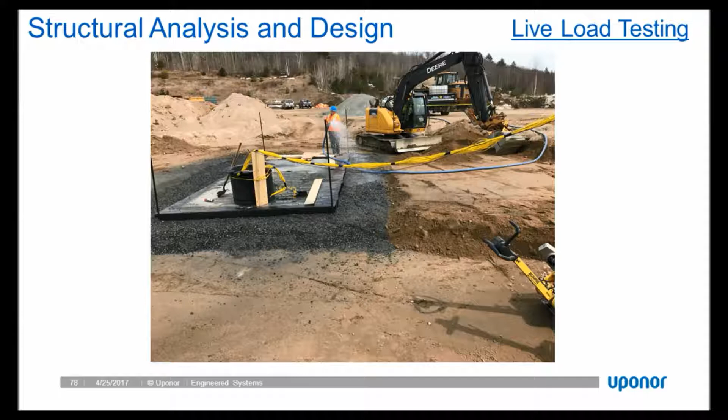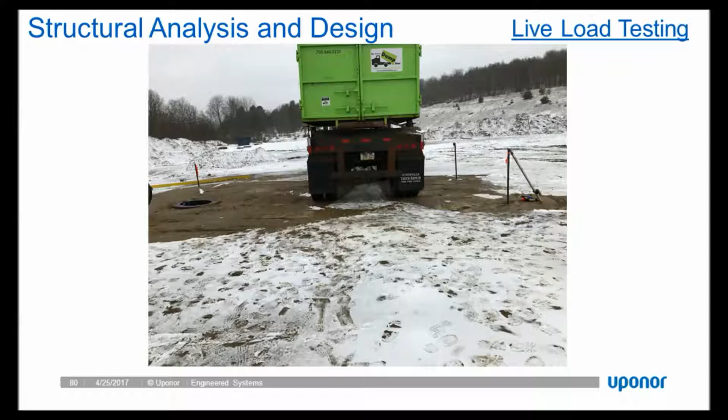Here you can see finishing off the backfill process and then bringing the vehicular load in. We brought the vehicular load in increments of one-third of the full 32,000-pound vehicular axle load. The way we achieved that axle load was we had a steel bin positioned over the rear axle, as you can see here, and down the road from the site was an aggregate facility that also had a weigh scale that would allow us to weigh the back axle.

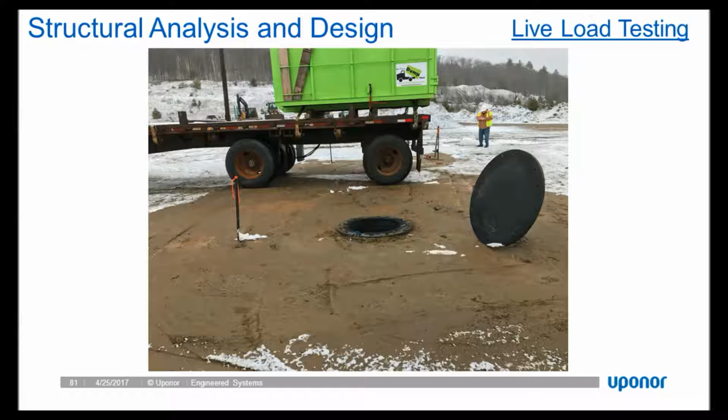So we simply fill up that bin with enough aggregate to get the axle load to the increment required, up to 32,000 pounds. Then we bring it to our location, park it over the system, and run our LiDAR scan, mark our points for pressure and strain, and allow the load to be applied for about a 15-minute total period of time to determine the deflection of the system and how the system performs.

At the end of the day, here you can see a snapshot of our external LiDAR scan and then our internal LiDAR scan, along with some of the wiring and other equipment inside the structure.

We're happy to report that at the end of our full-scale load test, our deflections for an unreinforced Weholite modular system under vehicular load were an order of magnitude less than our modeling had predicted prior to the development of the empirical data. So the system is much more robust, and we concluded that our design methodology was ultra-conservative.

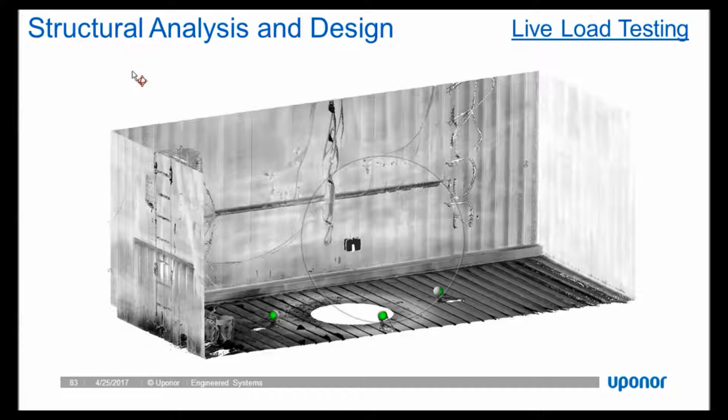The results in the field were much better than anticipated, and we now have the ability to refine our modeling and make the structure a bit more cost-effective based on this data. So before we hand it off to Grant for questions, I'd like to reinforce some of the points we made earlier regarding the advantages of the system.

Weholite modular is a 100% polyethylene system, durable, immune to pH, hydrogen sulfide, and corrosion, with a 100-year design life in the face of those constituents. It's a completely versatile system that allows us to custom fabricate to meet the needs of any project.

We have the support and resources necessary to help engineers and owners develop a system to meet their needs on any given project. It can provide a 100% watertight system with both factory and field quality control to ensure that system is achieved.

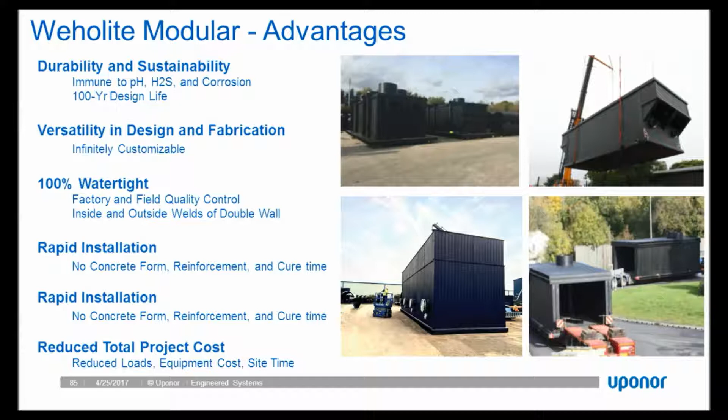Installation can be sped up significantly compared to concrete—a fraction of the time, hours or days versus many weeks or months. We can also significantly reduce project cost for large-scale structures, reducing the number of loads, equipment size and cost, and site time. So there are significant advantages to Weholite modular.

The applications where we can use it are virtually infinite—anything where treatment, pumping, or storage of water is required. As we discussed today, sand filtration and media filtration get a higher level of removal and don't lock your clients into a proprietary media system.

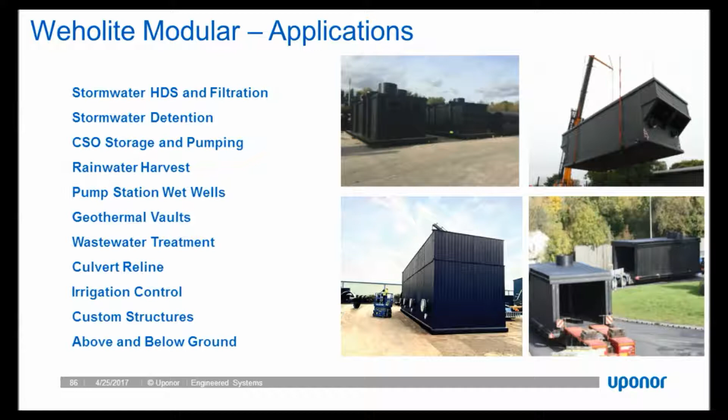We have the resources to support engineers in developing Weholite modular sand filter designs that meet their jurisdictional requirements and regulatory needs. And with that, I will hand it off to Grant to answer any questions. Thank you for your time today.

Great, Brian, I really appreciate that. We've had a couple of questions come through. One is: how do you account for buoyancy if I'm burying a unit below ground or below a water table?

Yeah, we should have included a bit on that, although it comes up frequently. It's a good question. Essentially, the way we counteract buoyancy is we'll extend the base plate of the wall panel outside the face of the structure to capture more soil load to counteract the buoyant force. However, there's a limitation on how wide we can ship, typically around 14 feet, where it starts to become less cost-effective and time-consuming to ship larger structures.

So when the width of panel or buoyancy anchor exceeds 14 feet, we would cast a simple 12-inch thick rebar-reinforced collar around the perimeter of the structure, and the toe of the structure locks into that. So when we can, we'll use the wall panel to counteract buoyancy; when shipping limitations prevent that from being cost-effective, we'll design a cast-in-place collar around the base of the structure, typically 12 inches thick, extending it a few feet outside the face of structure to capture the soil column.